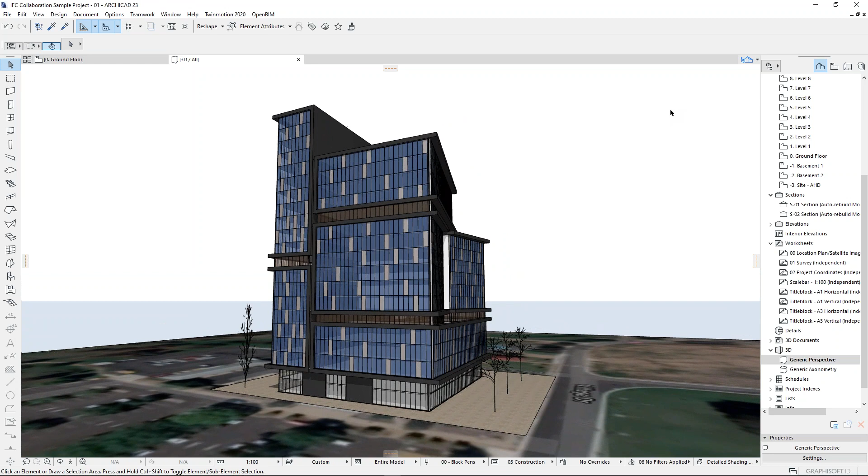Okay, so what you have right there is just a fairly simple model in terms of what's in there. We don't have too many items. That's not the purpose of these things. It's not about model complexity, but I wanted to have something that had enough bulk to describe a medium-sized building. What we have there is something about 20 stories with a couple of basements

located in New South Wales, in Bathurst. So it's further away from the coast. And I've done that intentionally, talking about trying to aim for worst case scenarios. So we located this project in a place where we're not that close to sea level. So RLs will be a little bit more than you would expect. So that's what we have for a model.

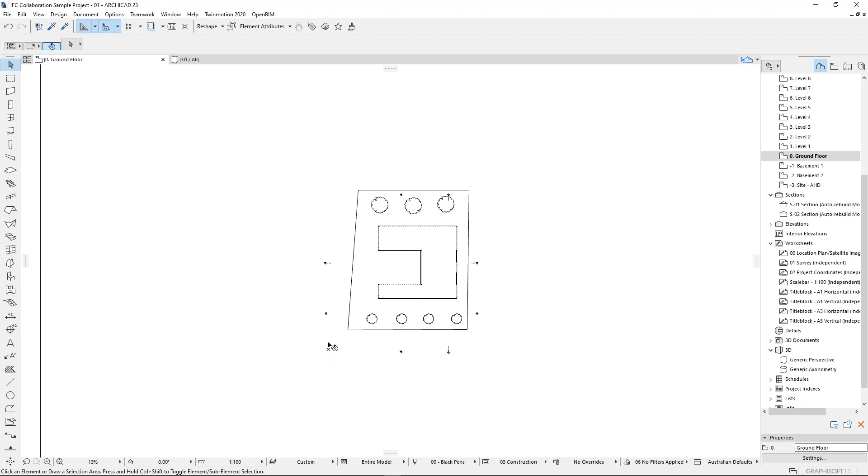And what happened in this project, describing all the assumptions that we're making, is that when the project was started, basically, there was no other assumption over Project North or location, simply taking on board the common best practices of locating our project on the upper right hand side of our Archicad origin, which is this little node in here. So that was done, typical thing to do.

And the only other thing that we did to locate this thing, in the lack of a proper survey, which is also a common thing, was that we just went ahead and took a picture from Google Maps or similar. Again, worst case scenario, probably you'll have better tools than this, but if I don't have anything else, I'll try to get my hands onto a picture like this just to give it a little bit of context.

So if I go back to my floor plan, if I want to have an idea of where this thing is located, I will probably just overlay that bitmap that I took at the right scale and place it in here. So as you can see, there's not a lot of magic in this. Half of this is guessing, half of it is intentionally put in a certain place.

So taken from this, what should you do to get things started and geolocate this project for the sake of collaboration? First thing you want to do is get your hands on a survey so that you know what's going to be the real or true north according to the coordinate system that you're using. The second thing is make sure that you can locate this project in northings and eastings, or X and Y, according to that coordinate system. I'm going to use MGA since I've got an Australian survey, but a similar thing will happen in New Zealand using a local coordinate system.

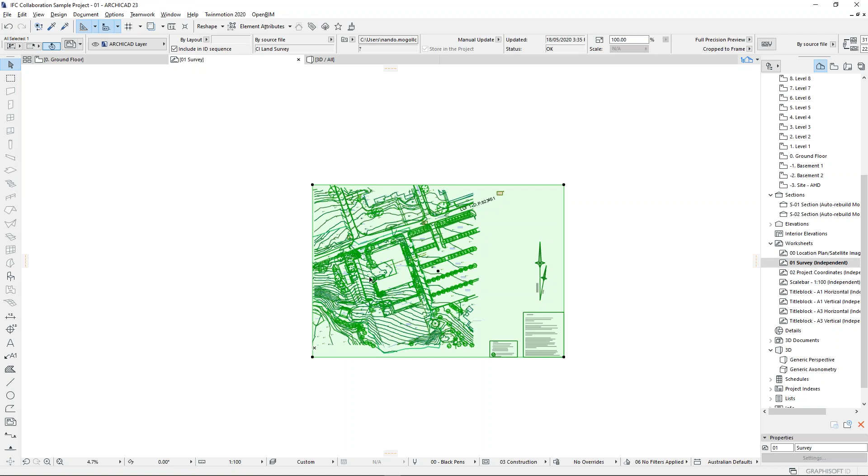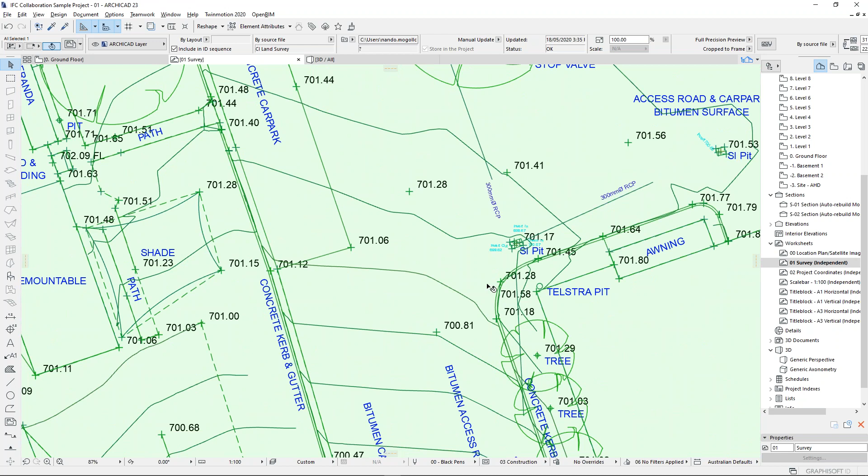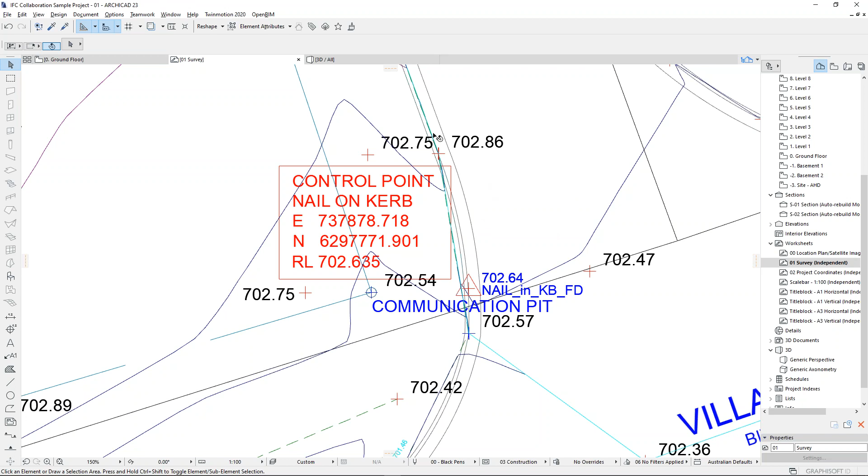And that survey is already showing me that Project North is not the building north as I put it. The survey also brings not only contour lines if you need them and RLs at every individual survey point, it also comes with something that I'm very interested in, which is the control points or nail points on or around the site. What I'm looking for are symbols like this. They tend to be triangles or triangles with a little circle.

And what they describe is the specific known location of something in the real world, typically one of those metal nails on the walkways or on the curbs, or sometimes on the street around the city. Those are kept there for control because they tend to be known places for surveyors. In this particular case, I have a few of them. I have this one here, located at this coordinate on the MGA reference system.

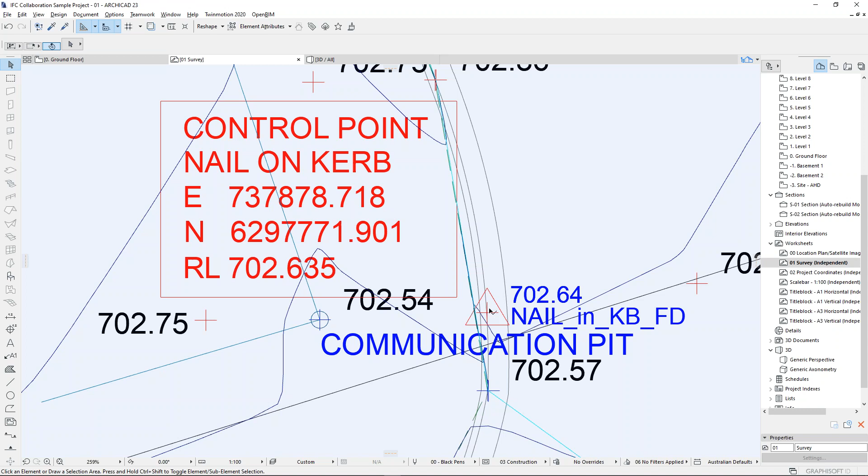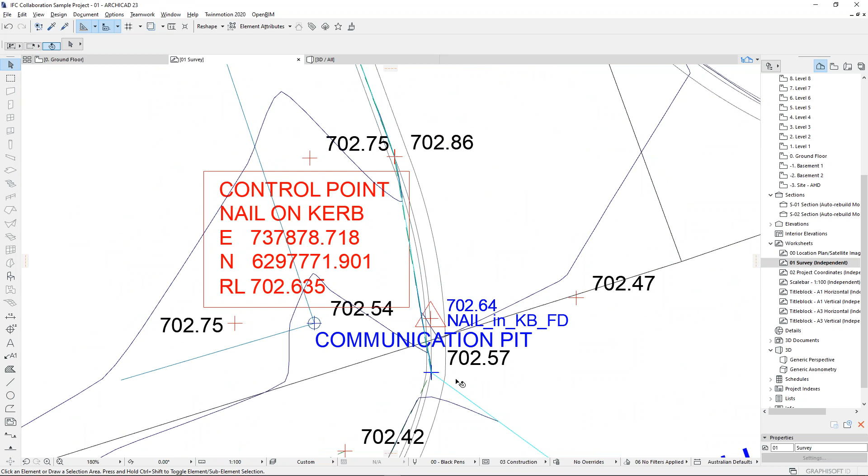That's a series of numbers. It's given in meters, so those are decimal places, and that's the RL of that one point. I have a few of them floating around. I have these, and I think I have another one up here. There you go. So the first thing I want to do, for the sake of knowing what's going on and being able to locate other points in the survey, is that only within the extents of this worksheet, I'm going to place these in the right location.

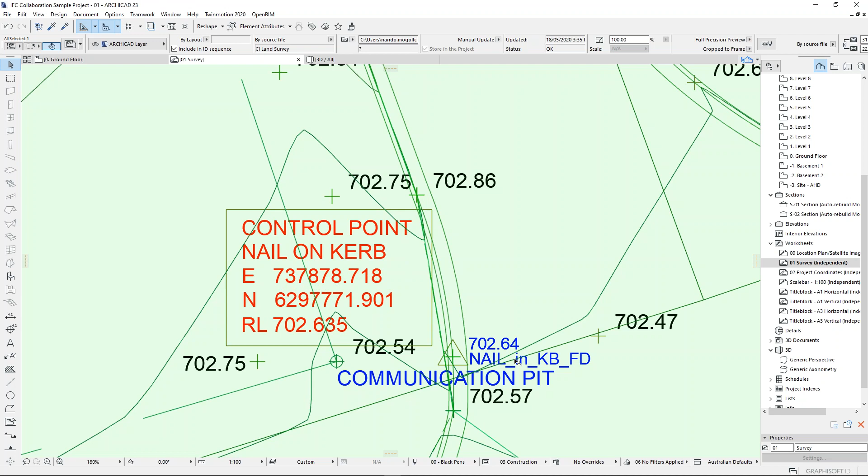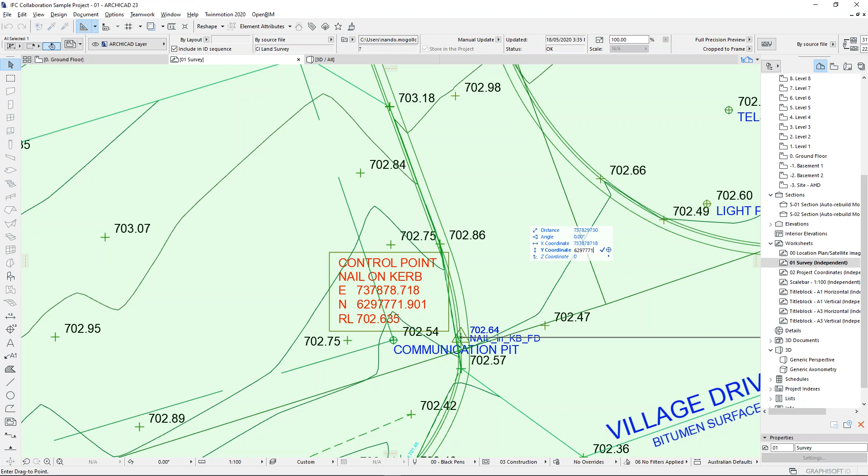To place that in the right location, all I need to do is move the center of the cross here to the X and Y locations as indicated in this survey. So I'm going to drag these from this reference point in here. And to get the location right, all I need to do is hit the letter X on my keyboard and type in the numbers on X and then in Y, 6297771.901, and hit enter.

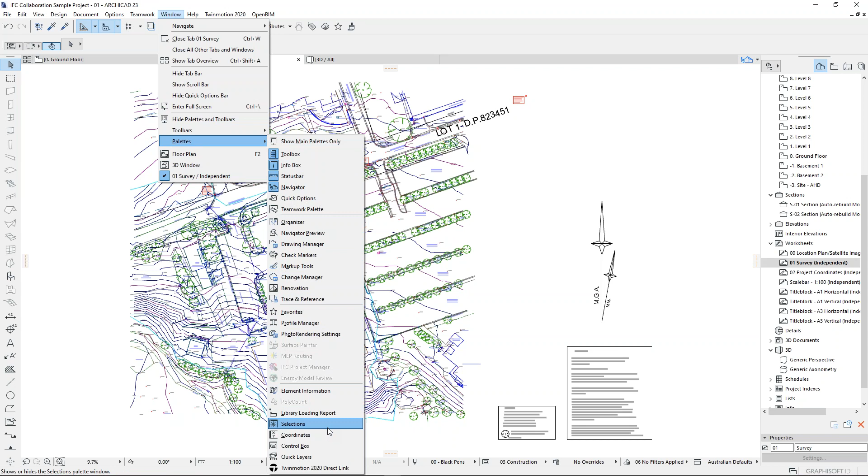Once you do that, that survey has been located in the middle of nowhere, up in what Archicad will see as real location. Now, how do I know that? Well, it's hard to tell here from the screen, so I'm going to bring in a useful palette called the coordinates palette. I'm just going to bring that about, and that's this palette here. I'm just going to place it back there so it doesn't get in the way.

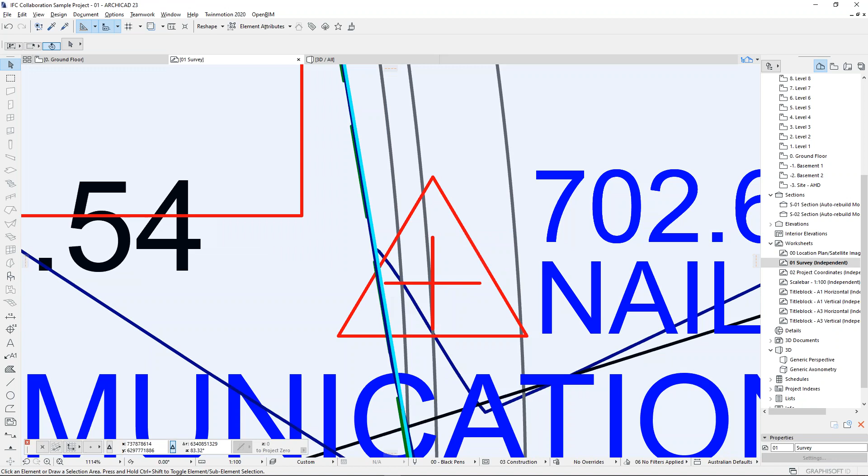And you'll see how this palette actually indicates the real coordinate system on a typical Cartesian system. So X and Y will describe the location of the mouse. So now if I get closer to that point, you will see how the numbers described down here will be the same numbers I had on that control point, meaning that I've placed this particular survey where it should be according to that coordinate system. Same thing will happen if I get closer to this one here.

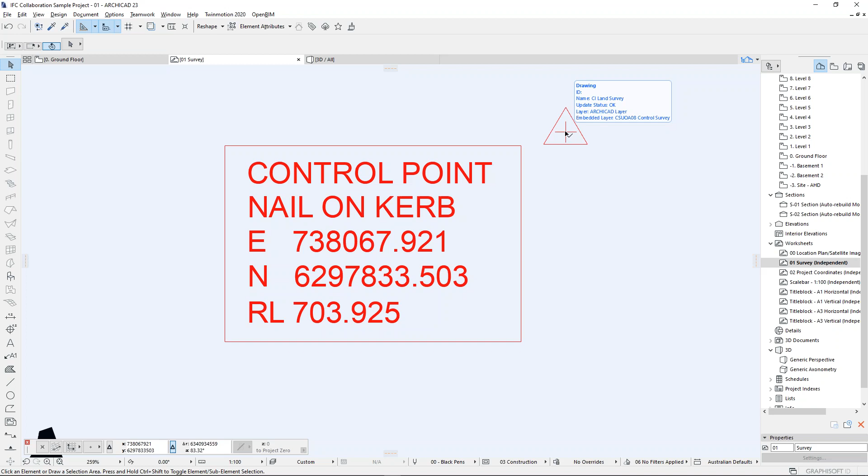You will see the numbers in the coordinates palette mimicking what you see here on the screen. So I know that that is the case. You can use another tool, which I have sort of pre-cooked here in my file. I saved that as a favorite already.

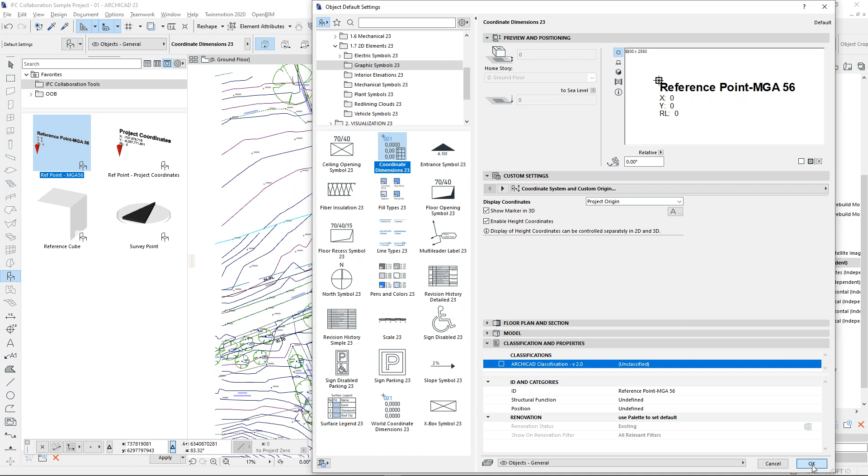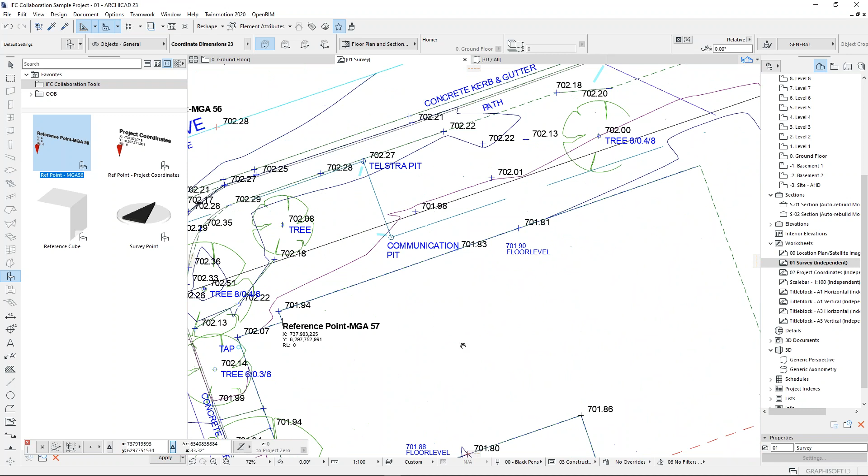What you can get is an object in Archicad called the coordinate dimension object, which you can find under 2D elements, graphic symbols, coordinate dimensions. And that one, when placed on the screen, will measure the location of that point from 0. So in that case, this was actually measuring from the real 0. So I can actually get real coordinates in this survey just by clicking on the screen using that object. All right. Let me get rid of this since I don't need that right now.

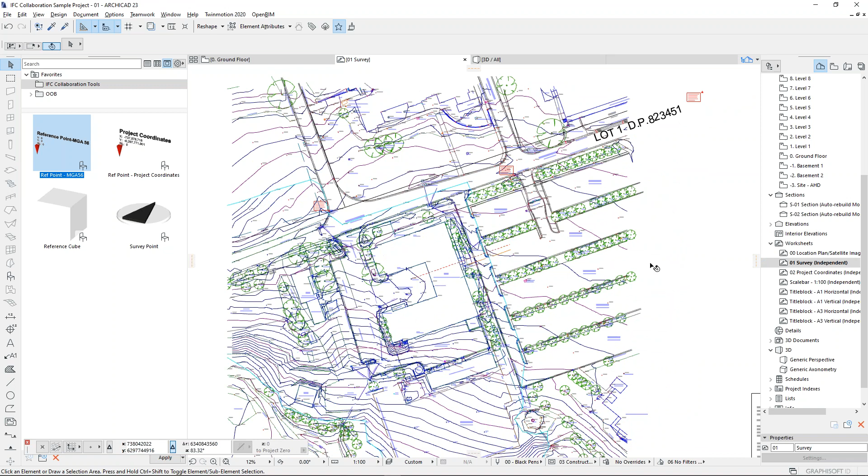Now that I've had that, how do I match this location with the one that I have already? Okay, so the second step: after you have done it a couple of times, you may not need to do the following step. But since I'm trying to demonstrate how to do it for the first time, I'm just going to go ahead and create another worksheet, and I'm going to call that worksheet project coordinates. I have it here, and I have it empty so far.

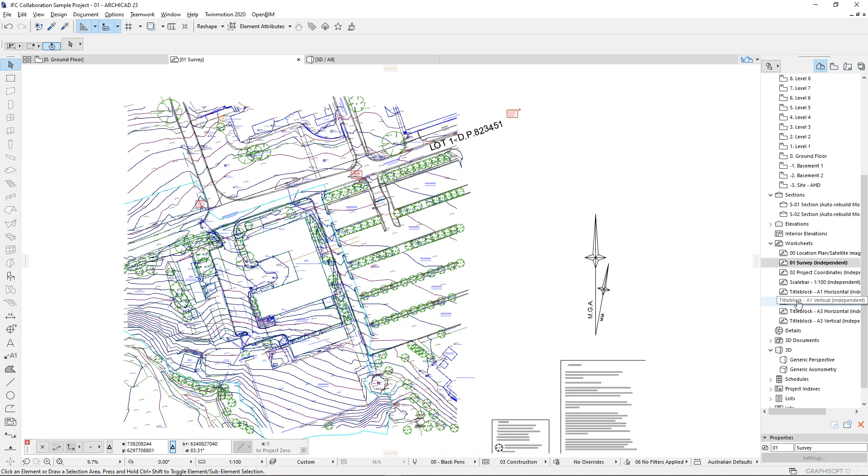Because what I want to do here is to mimic what will happen when you relocate the project and mimic a different location for the sake of exporting an IFC. So the first thing that I want to do is copy this drawing from the survey, go back to my project coordinates, and paste it there in the middle of the screen, like so. And now this one is not geolocated like the other survey that I have on the survey worksheet.

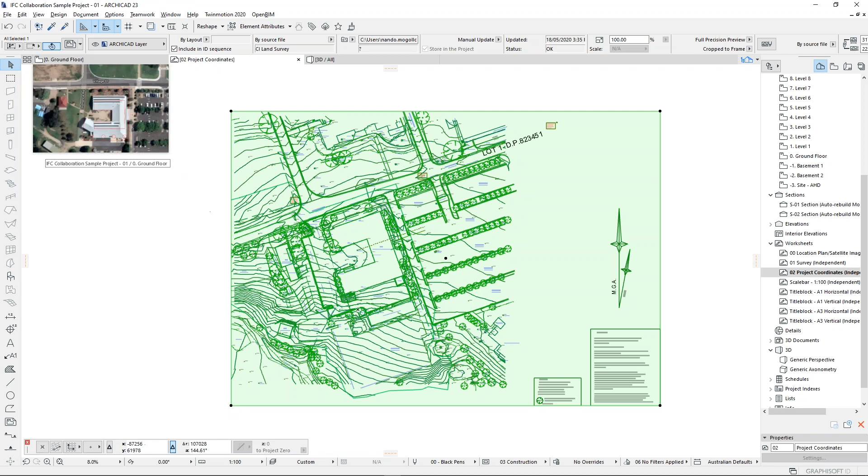This one is just sitting in the middle of nowhere, because what I would like to do now is to overlay my plan to see where this geo-referenced control point should be located, now that I need to export this to a known location for the sake of sharing an IFC. So first thing will be for me to trace over that floor plan, like so. So now I can see the floor plan sitting there, and then my movable survey sitting here.

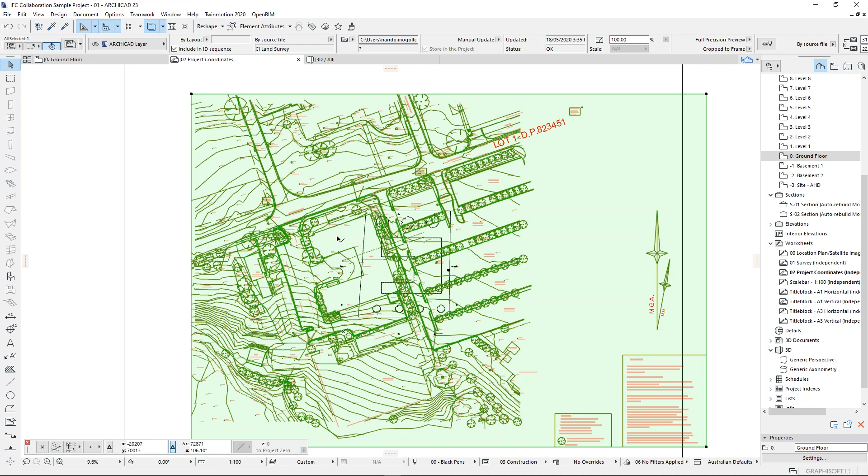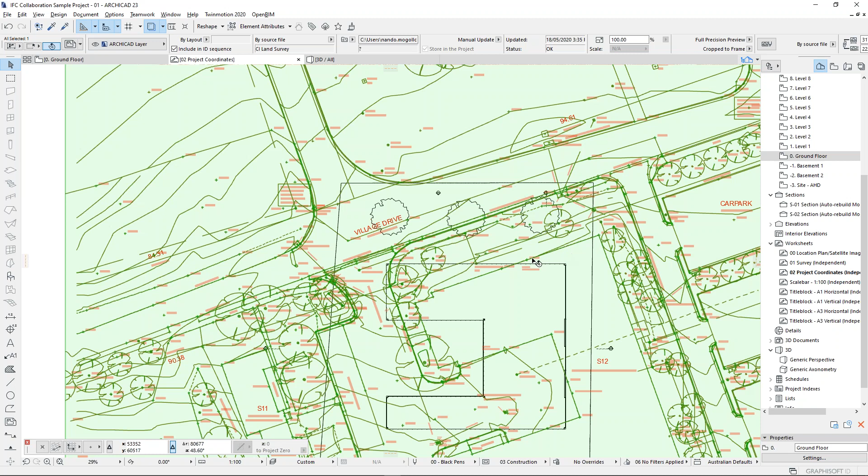So I'm just going to simply move my drawing so that I can locate it correctly. So let's move this point around here. It'll take you probably a few tries before you get it right, but it's okay. Moving X and Y is not a problem. What is trickier is always the rotation, which it's highly recommended that you always type in manually rather than trying to match lines, because there will be hidden decimal places that you may not be accounting for. So it's always good to go for round numbers when you're rotating.

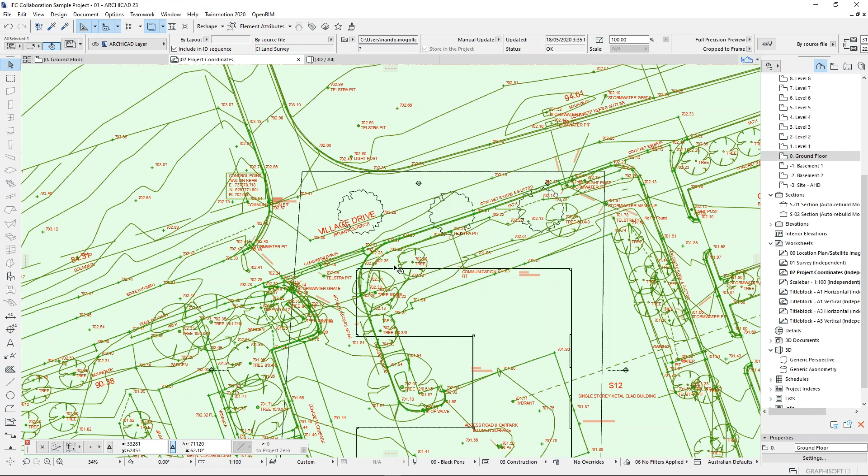So if that gets me closer to the building, that'll be fine. Then I'm just going to rotate this. It doesn't matter which point you use for now. So I'm going to use there and try to rotate this. I'm going to go for 19 degrees. Sorry, the other way around.

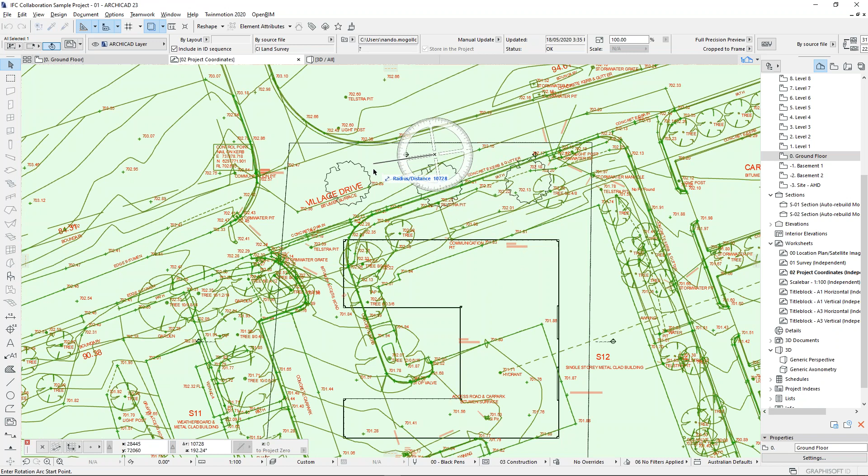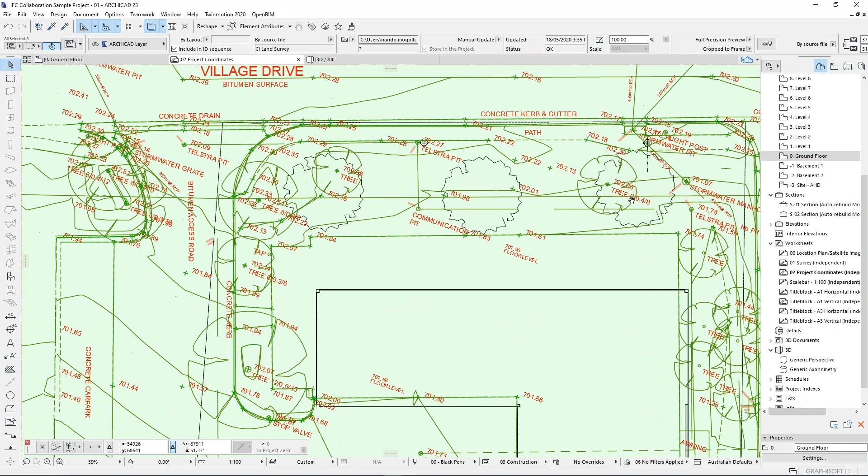Minus 19 degrees. That might be getting me closer to the thing. It seems like there's a little bit of an offset or misplacement there. So I'm just going to go ahead and try to match this probably to this corner there. Depending on the project and depending on what the real location is, probably one of these corners should match the other one. That I don't know.

This is an existing building there that I'm trying to match to the new one. So it could be the case that my argument will be that that corner matches this corner and so on. So depending on project need, you'll find the right location. The only thing that you actually need to be fairly careful with will be the actual rotation. If we're going to assume it's going to be 19 degrees the way I just did, it could be like that. But it could be a trickier number like 19 degrees and a few decimal places.

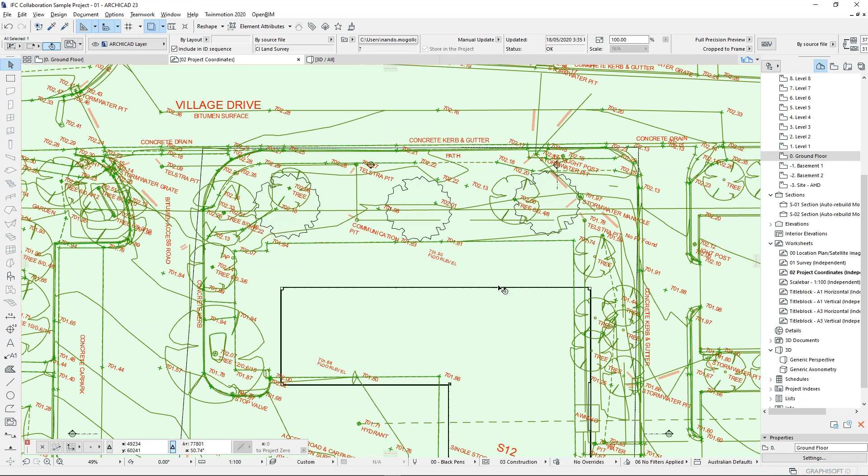But I will say try not to go for more than 2 decimal places, since then you can start struggling with accuracy. So just to round it up, I can see that that's what I was assuming to be the curved line. So probably I still need to move these up there like so, and maybe a little bit to the left like so. And I'm just going to leave it there. This is not a matter of precision for this one exercise, other than just make sure that you understand the process of moving around a survey with your building on the background so that you can locate things correctly. There shouldn't be any magic to this, but that really depends on project needs.

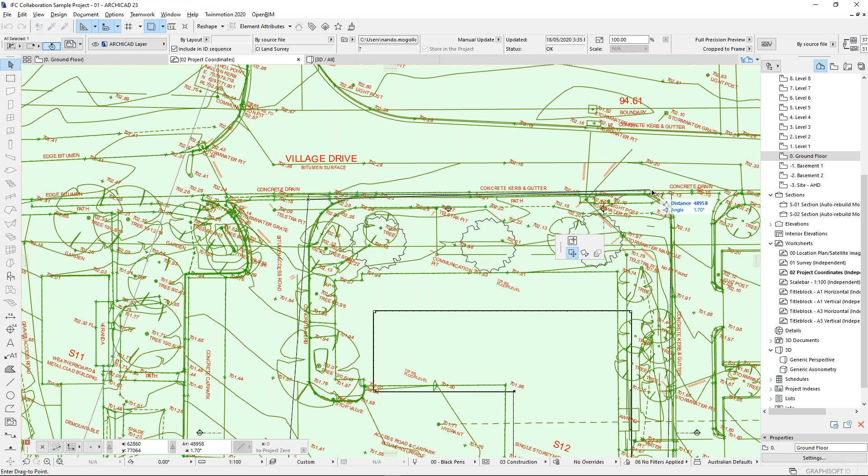I'm going to make the assumption that in this particular case, this line that I have right there, which is my assumed site front line, is correct. So if that is fine, then I've done my job with the project coordinates. And what I've done so far is nothing but matching a survey and accommodating the survey to my building. And the reason why I've done that is only for this.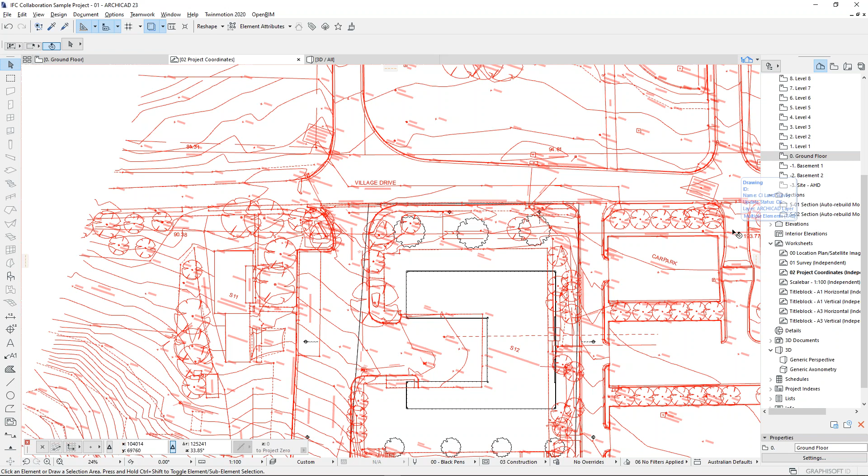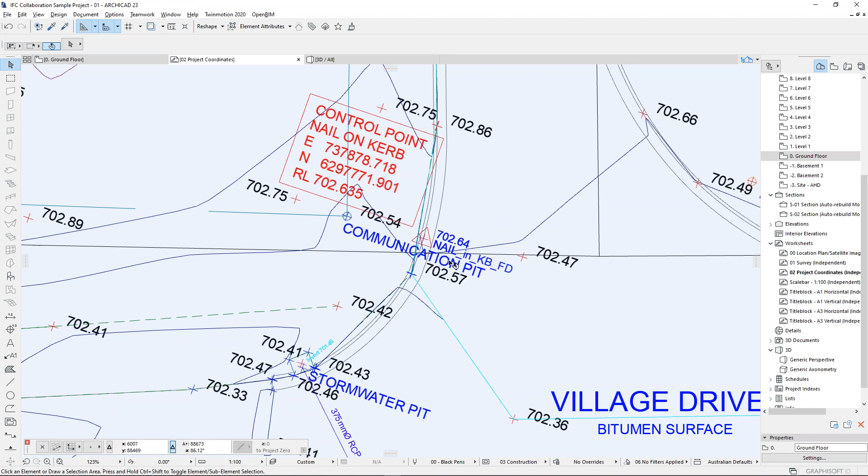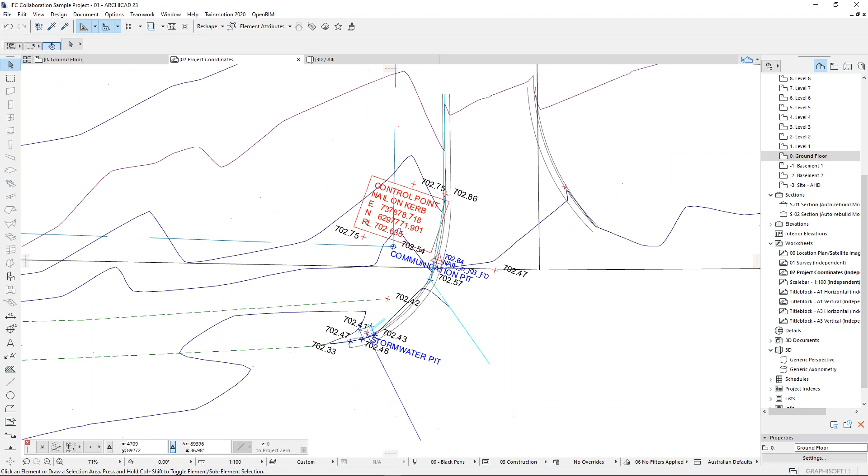Let me get rid of the trace. All I was looking for was to make sure that I knew where this control point, which is a known point in the world, will be sitting now that I have a better location to that from the building. So this point here will be my new 0. So when I exchange the IFC file, let's go back to the ground floor, instead of using the Archicad origin, which is this, I want to use that point up there.

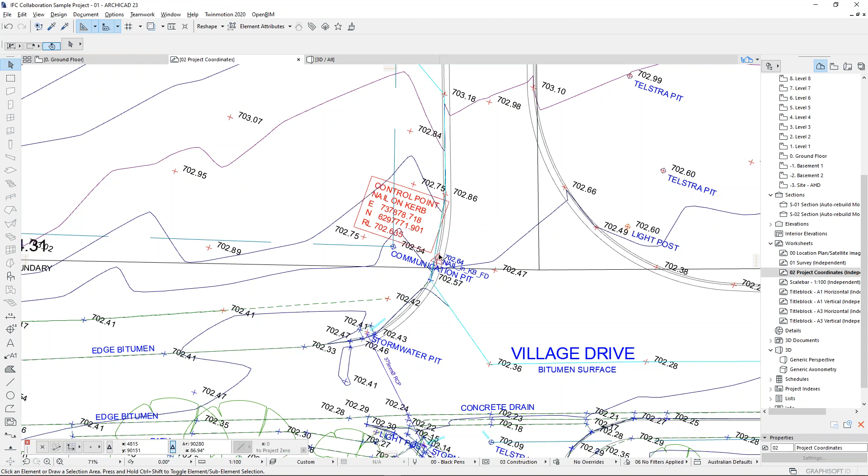And now that I have a real location, I can reference this to a control point in real life, then I can go ahead and go back to my ground floor plan, trace the project location coordinates, which I have in here, and then use this point to be my new project 0.

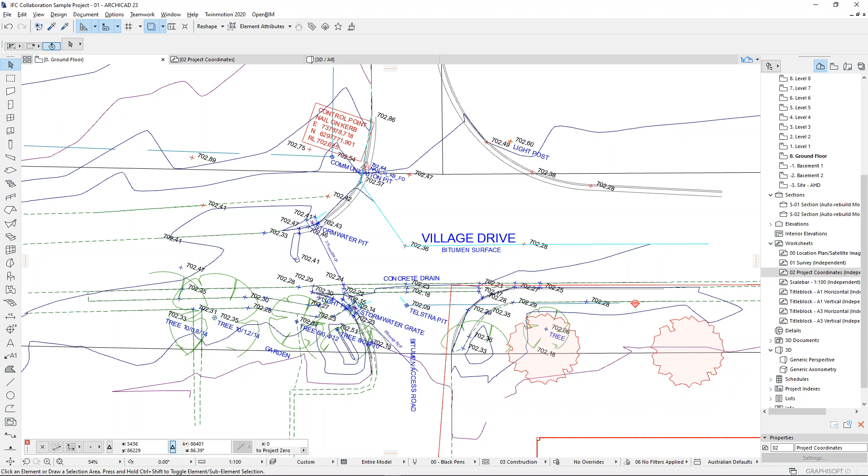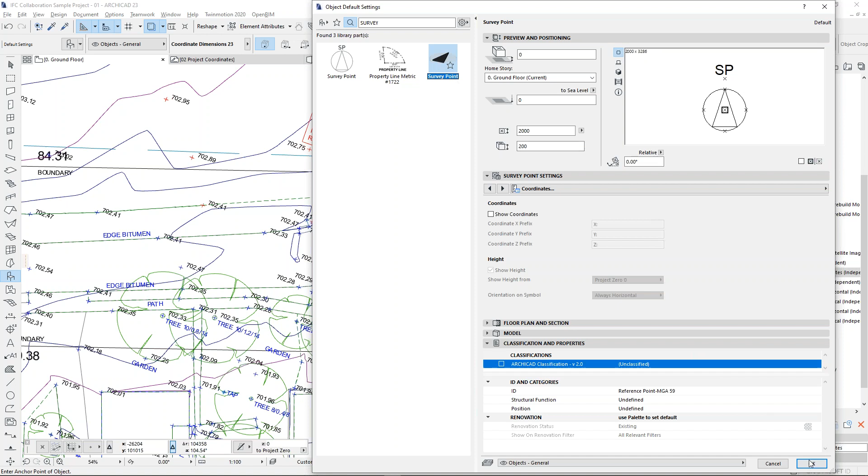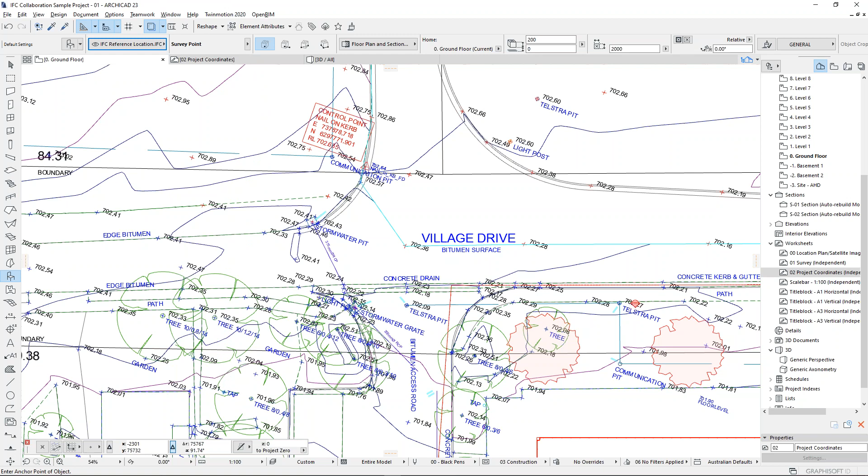How do you do that? Easily. All you need to do is to use an object in your library called the survey point. So go ahead and look for survey point. You'll get it right there. I have already saved a favorite for that, so I'm going to go ahead and use that. Let me double check here. Yeah, that's the one that I'm using. And I'm just going to place that on a separate layer that I have for it, and simply place that right there, center to center.

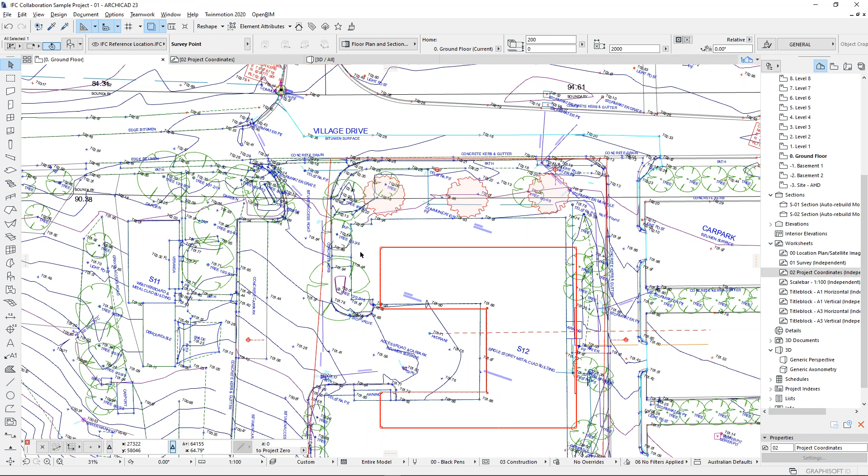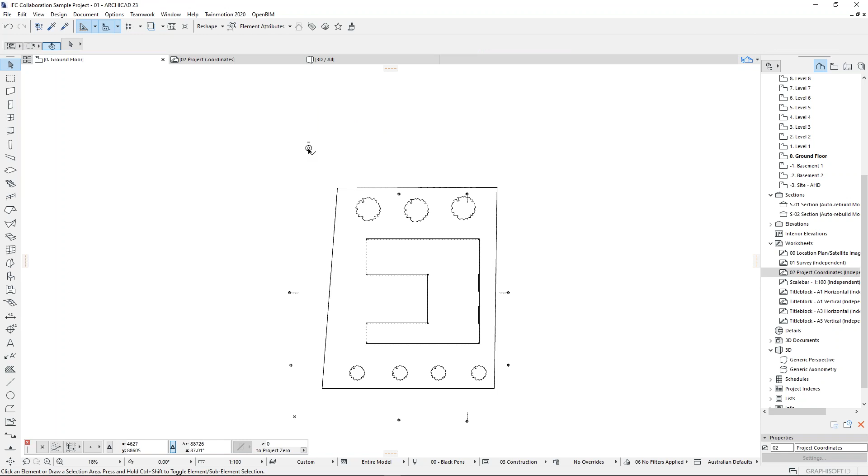Okay, so now that I've done this, this location can be used to save this file as an IFC, but I still need to do another step to indicate that that's what I want. From this point, Archicad can do two things. It can either export your file using the original project 0, or it will be able to use this point in here. There's still two things that I want to do to get this thing sorted. The first one will be to get the real project north, which is not that. Let's go ahead and check that. It's actually pointing that way.

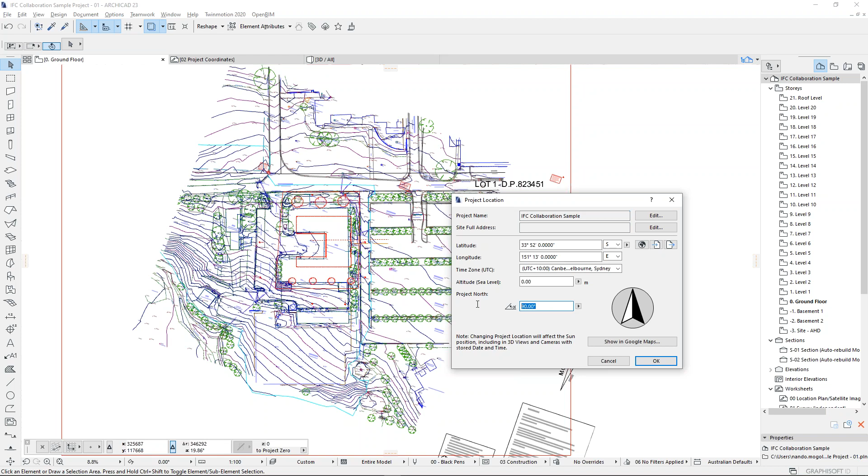So for that, I can go ahead and change my project north in the project location, where now, rather than being 90 degrees, it should be 90 degrees minus 19. So you can either type that there, or you can indicate that by using this line and trying to match that. Now, if you try to match that, you'll see that you start getting decimal places there that might give you errors. So that's what I was saying. Try to go with numbers rather than matching lines, because different lines might not be accurate in that drawing. So trust your own numbers rather than trusting a drafting line produced by others.

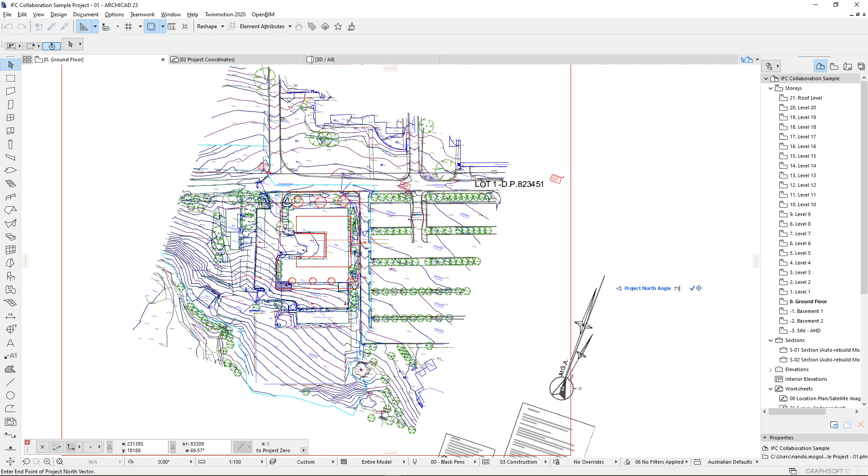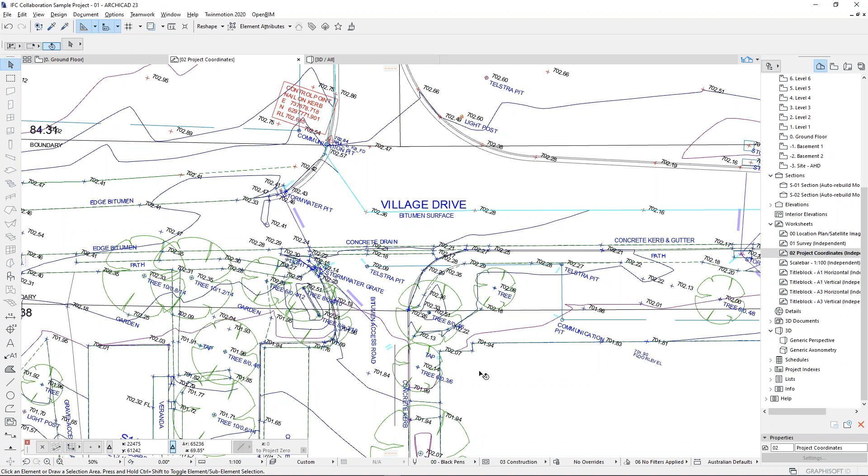So going this way, 19 degrees will take me back to 80, and then closer to 71. So I'm just going to go ahead and type in 71 degrees. And you'll see how the survey points, by default, tend to follow the project north. So now when I export this file as an IFC, I'm going to get something that will resemble the exercise that I just did in here, where this will be the origin, and then the building will be sitting there at an angle. Sort of, kind of, let's show you that with this.

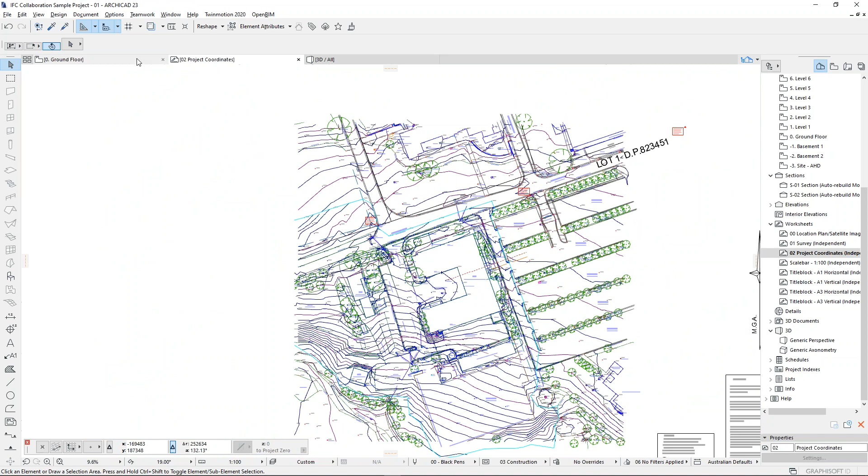90 degrees. So it'll be something like this, where this is going to be the origin, and then my building will be sitting down there, right? So with that, I'll be sorting project north, done. And then I need to sort out the RL.

Common practice here in Australia is that we tend to go and fix the story settings, basically by saying, all right, my ground floor, or my basement or site, one of those levels, I'm going to locate that in real height. So people will start typing in 702 and so on. That's not completely necessary. And let's say for worst case scenario, we sort of screw it from the beginning. So we're assuming that we have to reset that to 0.

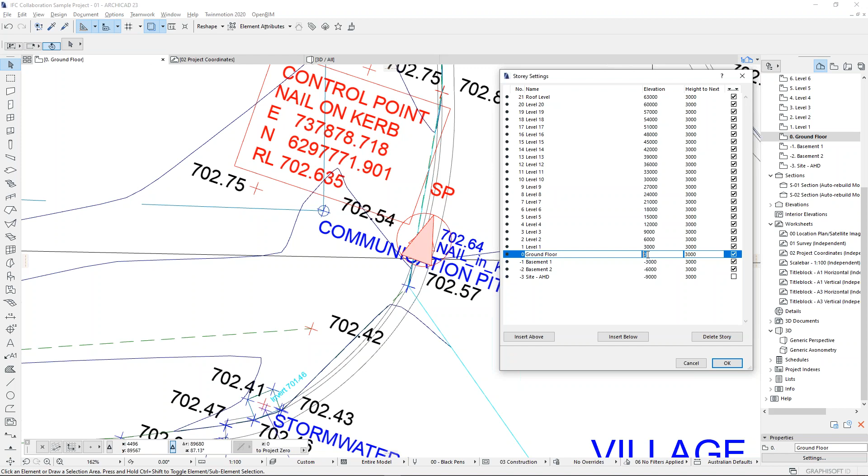And I won't change that right now. Not enough time to do that. So rather than doing that, what I'll do is this object, I'm just going to sink it enough to match that number. And in doing so, you will effectively be elevating the entire project by around that number. Easy to do. All you need to do is type it in here. So I'll say, well, you're going to be minus 702,635 millimeters. So that's 700 meters and a bit down.

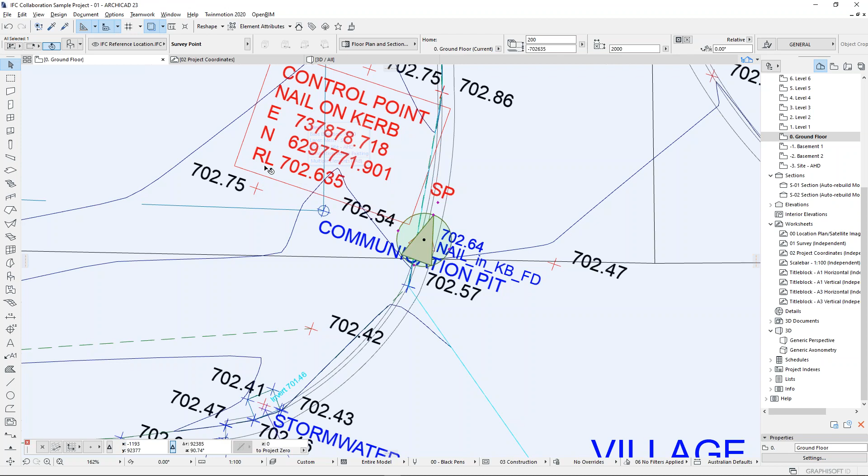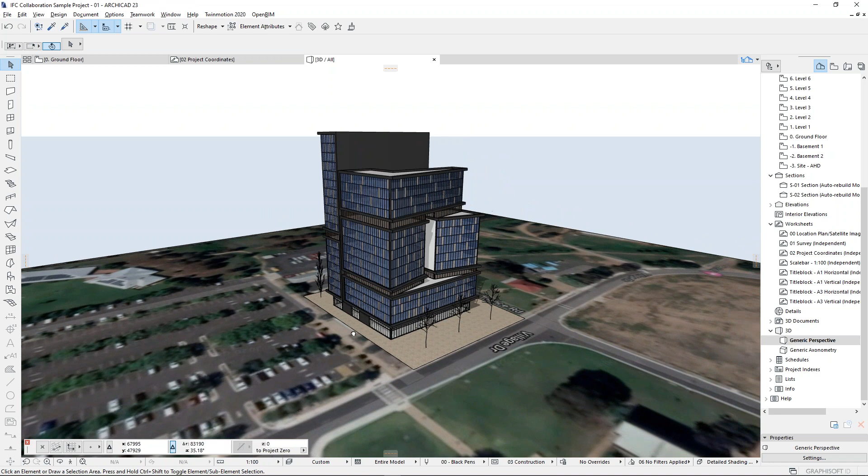And by doing that, my building will be elevated by the RL distance when it goes to IFC. The Archicad file doesn't move, it stays where it is. All right, so last few steps. What's missing at this point will be to go into a 3D window, deciding what I need to save for the sake of sharing this very first and initial IFC. And as it is best practice, create a translator that uses that one particular survey point for the sake of export. So let's go ahead and do that.

What you will do is go here to your OpenBIM menu in IFC translators. I will have a bunch of out-of-the-box translators in here, which are fine as a starting point, but since this will be project specific, I want to make sure that the one I have will be doing the right thing for this project. So I'm going to start with this one that says general parametric export. You can start with probably the IFC 4. This one is based on IFC 2x3, which is very common still. I'm going to use that because I know it's based on a model view definition called coordination view, which is fairly close to what I'm looking for.

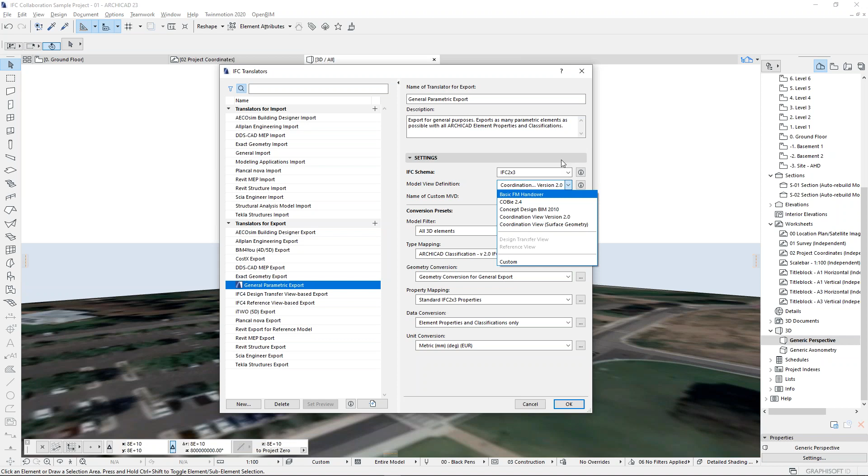And I'm going to start by creating a new one, which is going to be a duplication of that. But then I'm going to call it IFC webinar, since that's the name of my project, and then project location. Going to go ahead and click on OK. So now I'll be using that for this last bit of the exercise.

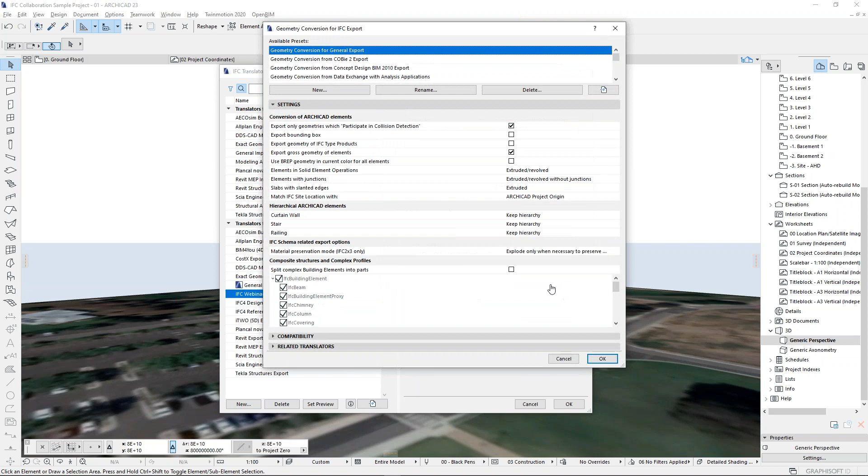Then the next thing you want to make sure is that this geometry conversion option here, that preset, uses not the project origin in Archicad, like it says here, but rather the survey point. Now, I don't want to change that one because that preset might already be used by other translators. I'm going to create mine and leave the same name, geometry conversion for general export, and then add survey point at the end, to indicate that this one will be using the survey point, and change it. Now I have a new preset in here. I can click on OK.

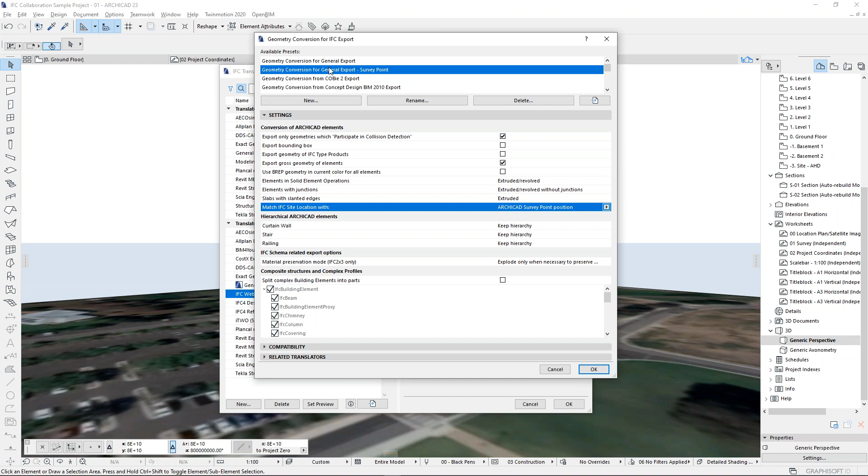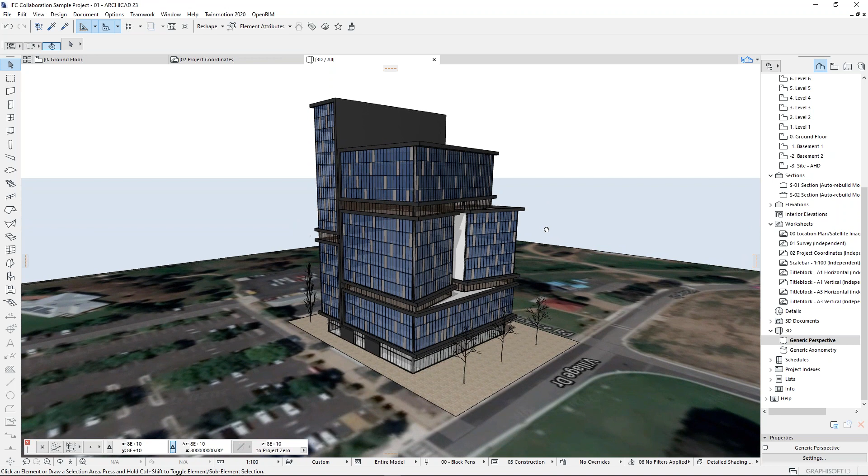And for this one translator, I still need to go down here in this list and indicate that that's the one that needs to go with this. So if that's done, all I need to do is click on OK. And as a quick exercise, we can just simply go ahead and say save as, like so.

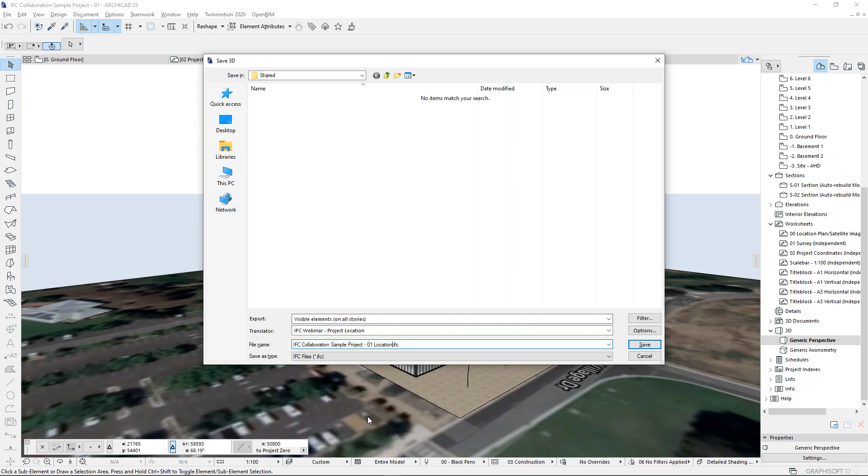I'm going to choose a translator here, which in my case will be IFC webinar project location, the one I just did, and save in my folder an IFC called IFC Collaboration Sample Project, and then 01 location. If that's all right, all I need to do is hit save. It's saving all visible elements, so everything that's in there. Probably some things will be filtered out depending on translation. Go ahead and save. And let's give it a minute or two.

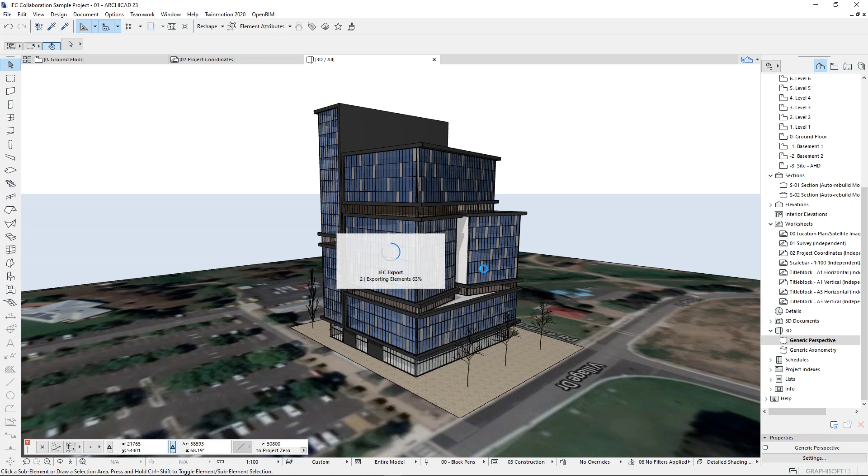Okay, we're going to give it another few seconds. Should be finishing soon. Okay. I've got the trees there that do not export as they should, but it's all right.

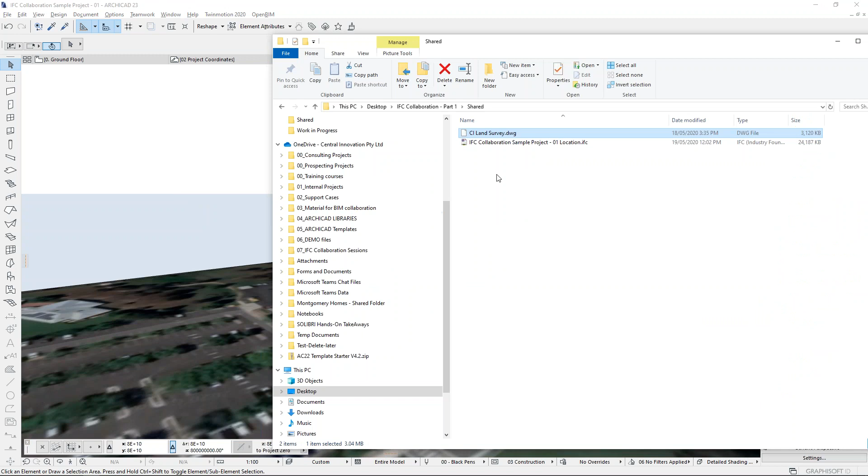Cool. So now I've got an IFC sitting here that I want to go and take a look at. So what I'll do is I've already launched Solibri Anywhere, which is the free version of Solibri. And then I'm going to take a look at that IFC and see what happened with it. So I can go ahead and click on Open a Model. I'm going to go to my desktop, navigate to the folder that I've got, open the file.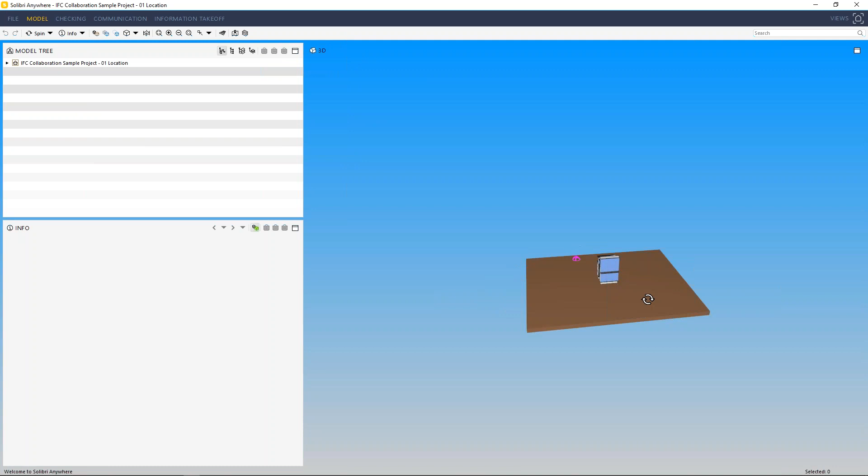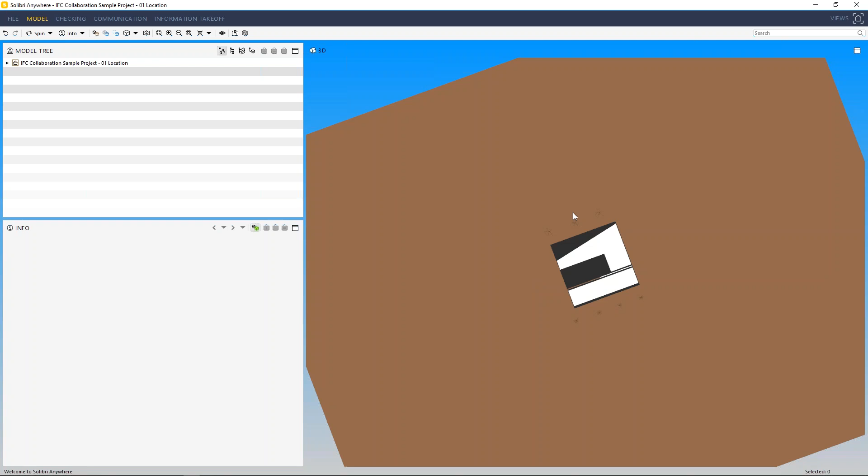Yep, there would be an architectural file. That's all right. And then what I've got here is a project file that I have exported, and I'm worried about the actual location of this file. So if you want to go ahead and double check that, we can go check that from the top. You'll see that effectively this building is being twisted. So we are in a real location for the sake of the export. So this thing is looking at the building correctly.

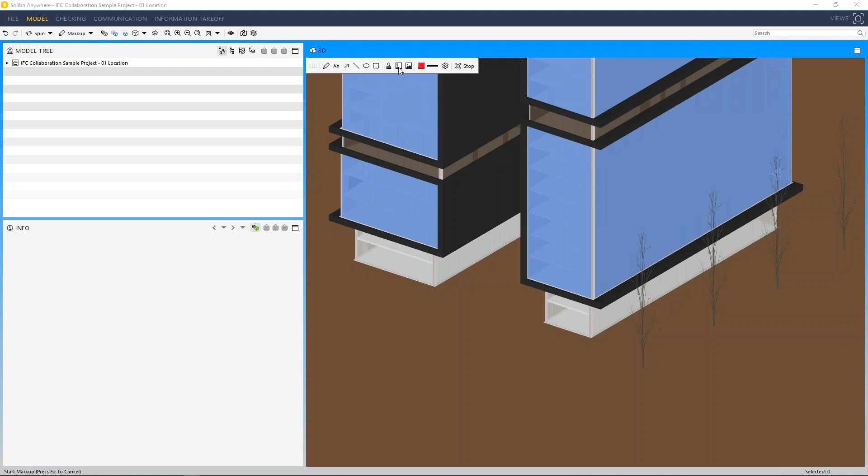And if you want to check location in here, all you need to do is use a markup tool that brings you location on top of the screen. So that will be this coordinate stamp. And then I can look at locations simply by clicking this button here. And then you'll see that location of elements will be displayed already here. And voila, we've got a building that is already geolocated according to a reference point that I've indicated.

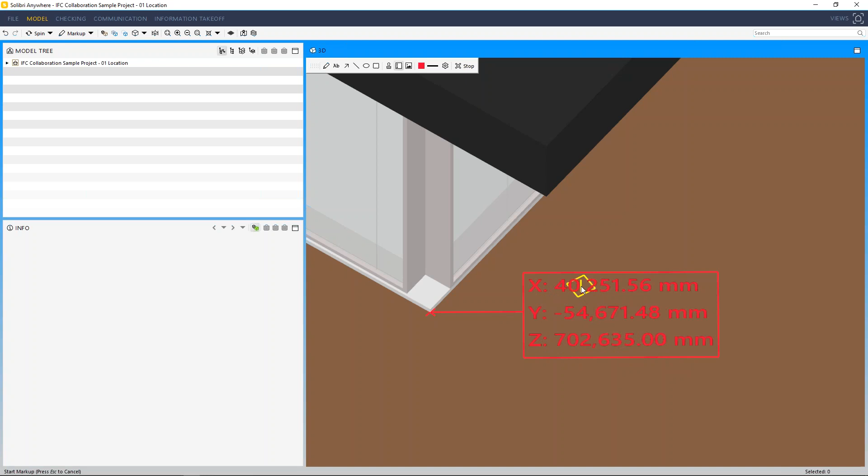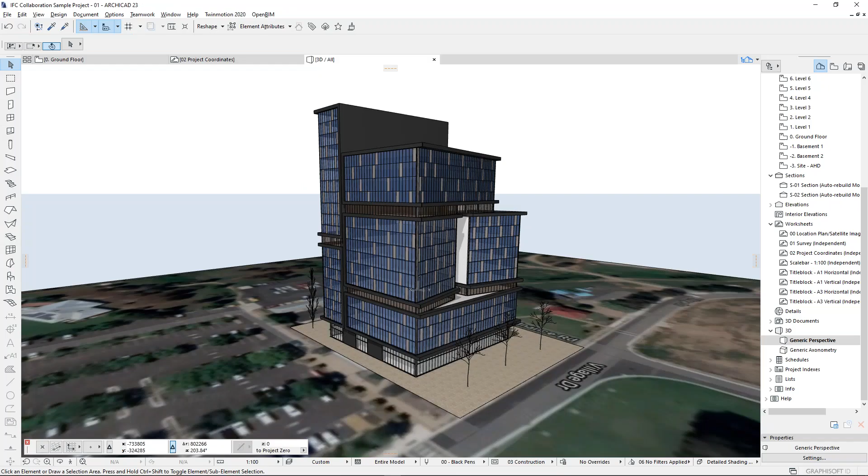Elevation, as you can see there, has already been fixed. And the X and Y, northings and eastings, are already being measured from the point that it's located. Let me take a look. That will be up here in the middle of somewhere. So that is a way for me to change a location from Solibri Anywhere.

A couple of extra things that I need to mention at the end. When you export the IFC by using the survey point, it doesn't even have to be visible. You can have it on a hidden layer and it's still going to work. Number one. Number two, if you, for whatever reason, ended up placing more than one survey point, only the first survey point will be taken into consideration.

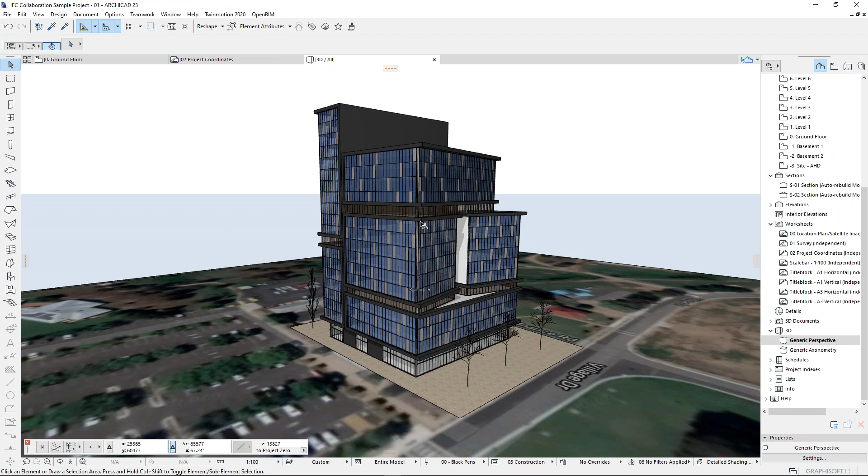Okay, so what I'll keep doing in the next sessions is continue with the same building with the same exercise, because there are still a few items there that I want to fix. There are a few geometry issues there, but that was not the purpose of this one. It's a fairly early model with a very early intention of fixing location. So we're going to continue with that exercise in next sessions.

A few relevant articles that you will like to go and check, because they have far more detail than I can give you in these few minutes. There's a basics of IFC-based model exchange export, if you follow that link. And a further explanation on how the survey point is supported on the IFC side for export and import, including a few comments on how it behaves when that gets read on the side of companies using Revit.